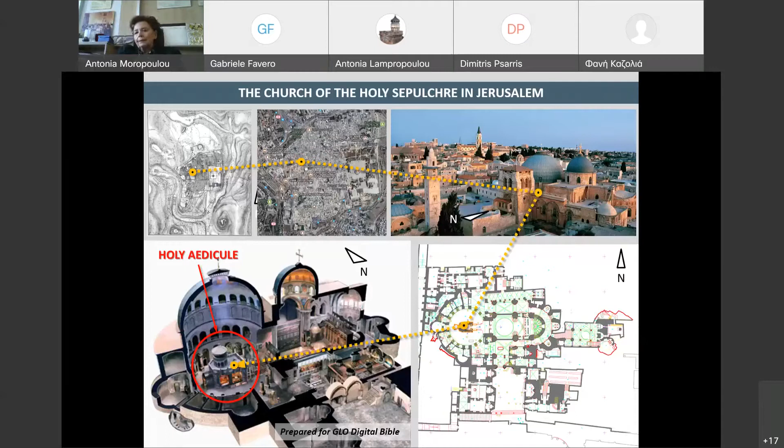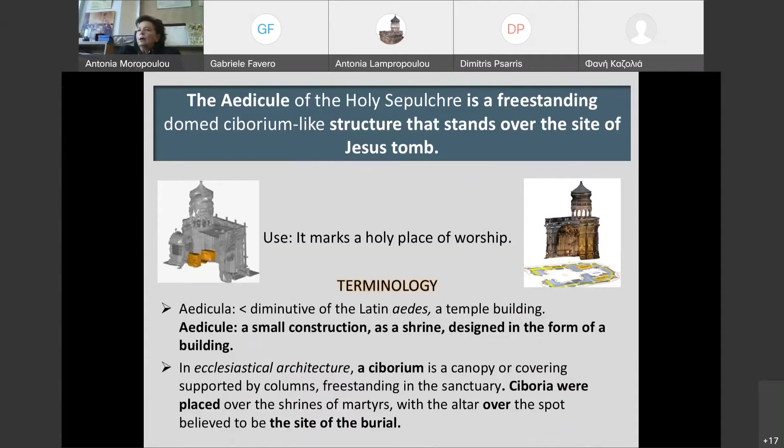Through the ages, the Church of the Holy Sepulchre in Jerusalem is the most important monument for Christianity, and not only. In the Holy Sepulchre complex there are brought nearby the Golgotha, the crucifixion place, and the tomb of Christ where he was buried and resurrected. The Holy Tomb was covered by the Holy Aedicule, a small construction, a shrine designed in the form of a building, which was transformed through the centuries from a rock-cut grave to a ciborium supported by pillars, and finally at a

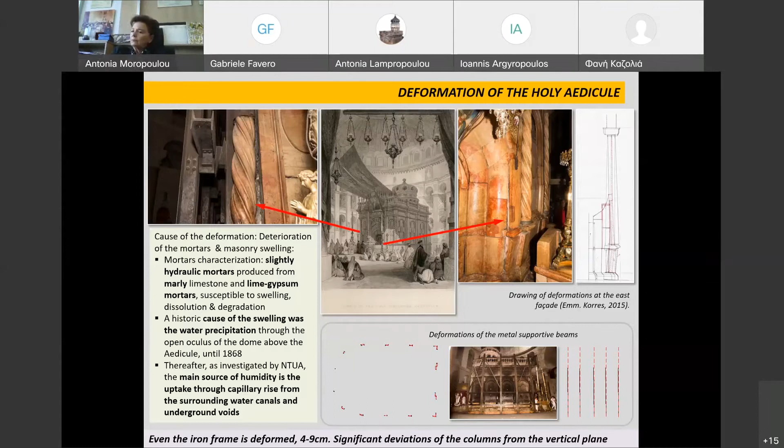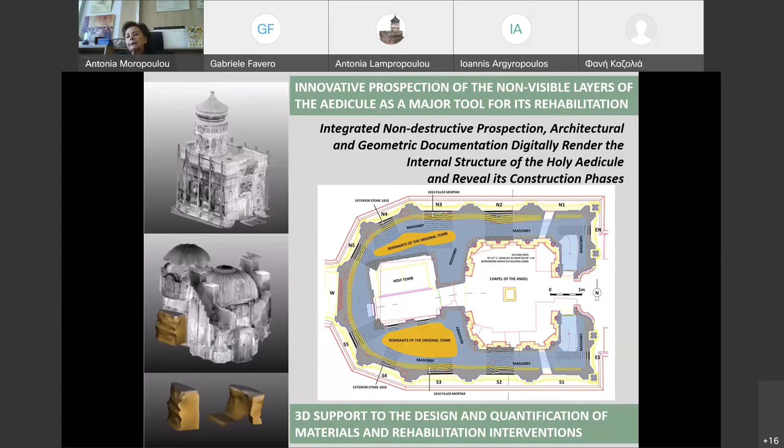1947. The innovative prospection of the non-visible layers of the Aedicule as a major tool for its rehabilitation was a real start of the diagnostic project. Here you might see the 3D support we developed to the design and quantification of materials and rehabilitation interventions after the integrated non-destructive prospection, architectural and geometric documentation, and the digitally rendered internal structure of the Holy Aedicule by the ground-penetrating radar prospection.

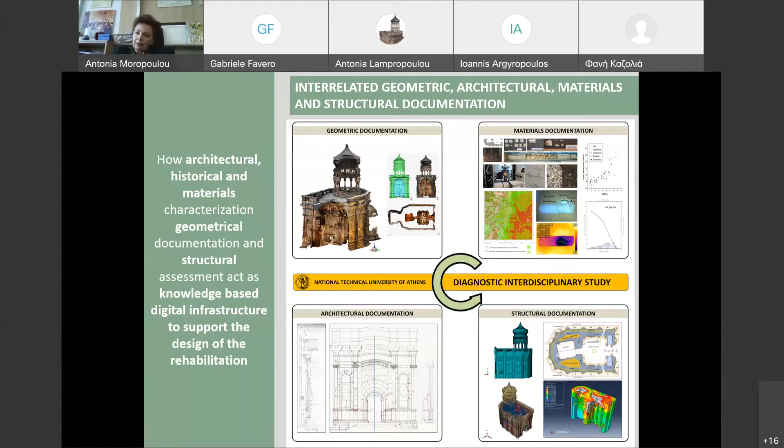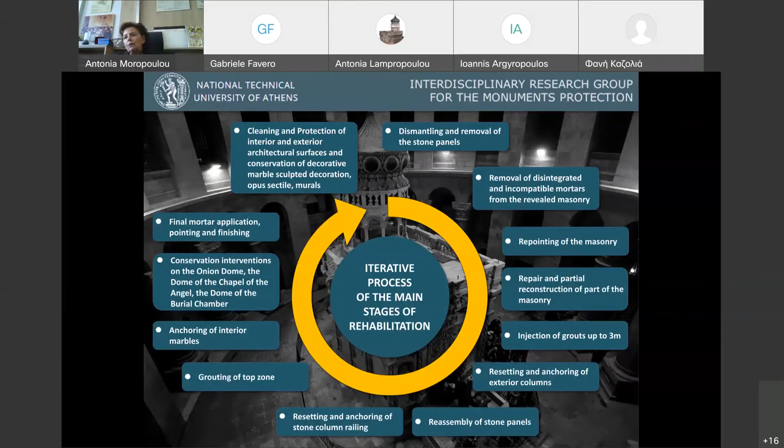The interrelated fusion of data became feasible due to the 3D documentation, due to the materials documentation, due to the architectural documentation, which permitted the structural assessment through the construction of the finite element modeling approach, using all the elements of the non-destructive prospection, the modulus of elasticity out of the materials characterization, and of course, all this fused and evaluated on the level of the 3D model. That made feasible to design the iterative process of the main stages of rehabilitation, which gave us the tools to proceed with a strict plan and to proceed effectively within the time limit we had, and it was very, very short.

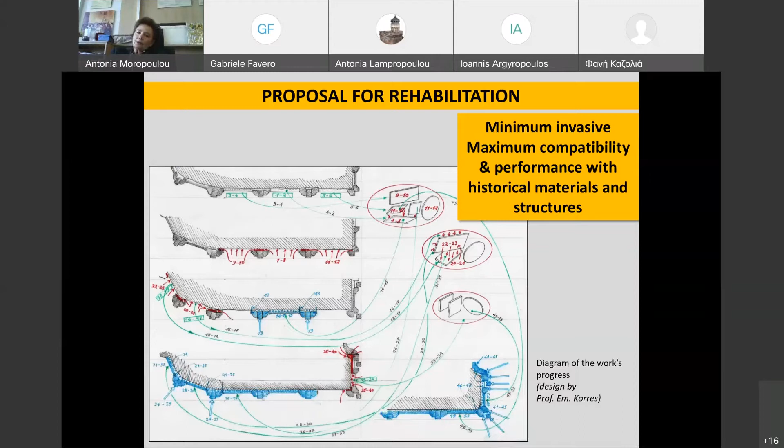However, the philosophy of this proposal of rehabilitation was the minimum invasive and the maximum compatible and performing interventions with the historic materials and structures. And that means not inducing anisotropy, similar thermohydric behavior, ensuring breathability, not introducing soluble salts, adequate mechanical performance, which was assessed with the FEM, while the non-destructive tests like the infrared thermography were actually documenting compatibility or incompatibility of materials to the structure, and of course the problems of the humidity uptaking.

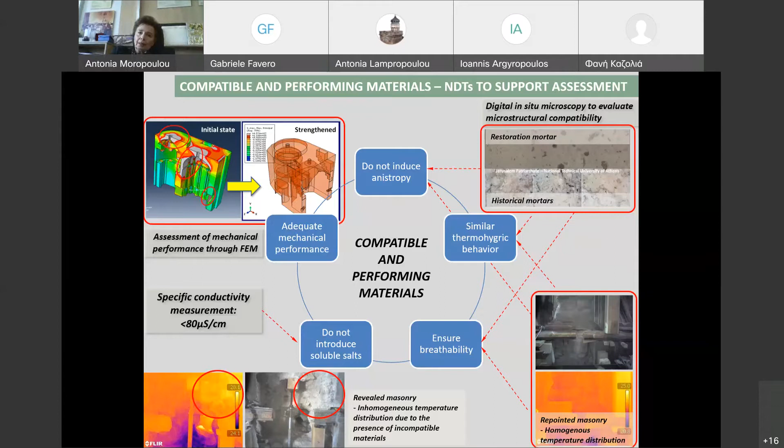The common agreement of the status quo provides NTUA and me personally with the honor and the huge responsibility to have the supervision, the scientific supervision of the project rehabilitation, and more explicitly, scientific, technical, and administrative aspects of the project were under my responsibility. The signatures of the Greek Orthodox Patriarch of Jerusalem, Theophilus III, of the Custos of the Holy Land of the Franciscan Order, Pier Battista Pizzaballa, who was succeeded by Francesco Patton, and the Armenian Patriarch in Jerusalem, Archbishop Nourhan Manougian, were the actual initiators of the project.

And which was the project? The project was a real challenge from every aspect of implementation methodology. First of all, the construction site should comply with the urgent need for continued operation of pilgrimage and of all the liturgies, while the decision making should be scientifically supported by the continuous scientific on-site assessment of all the interventions to the monument, while a crowdsourcing funding was searched out and achieved with the responsibility of the three religious authorities.

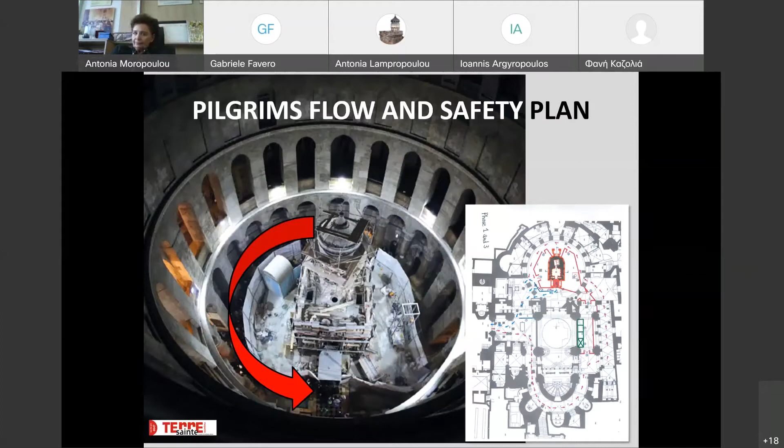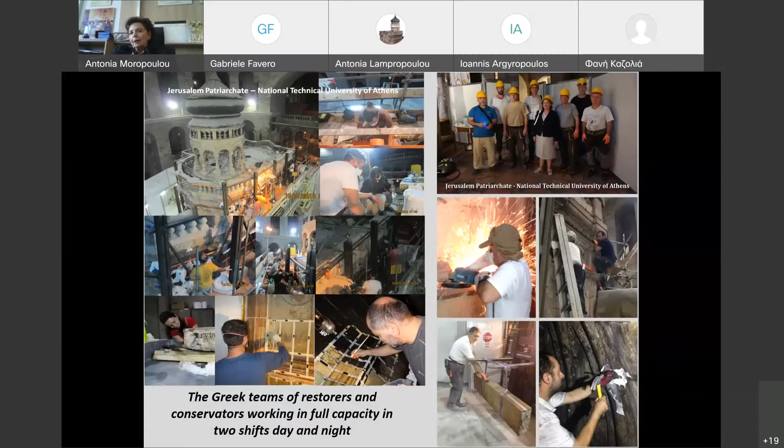The work site is successfully organized without disrupting the flow of pilgrims or the religious functions. An additional lateral support to the '47 iron frame of the British mandate was applied. A pilgrim's flow and safety plan was modified. A conservation lab was established and functioned in the Franciscan Gallery, and at the same time, an interdisciplinary scientific lab was established nearby the Holy Aedicule. The Greek team of restorers and conservators were working in full capacity in 2 shifts, day and night, and the scientific team was working in parallel with all of them.

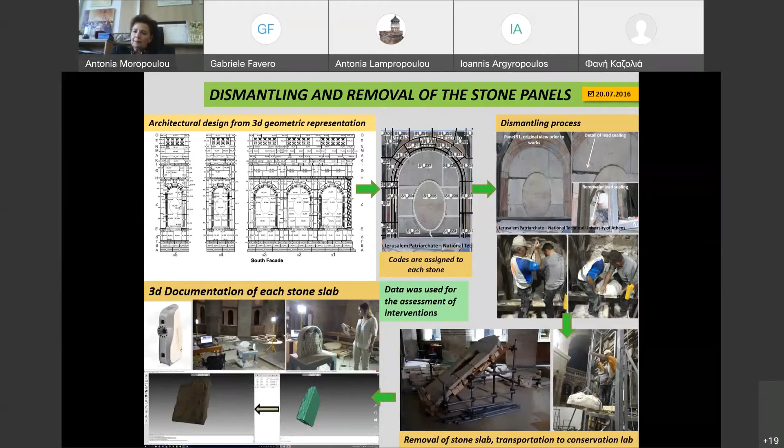The phases of the works flowed to accomplish the project on time. We started with dismantling and removal of the stone panels, which were transferred to the conservation lab to be documented and preserved.

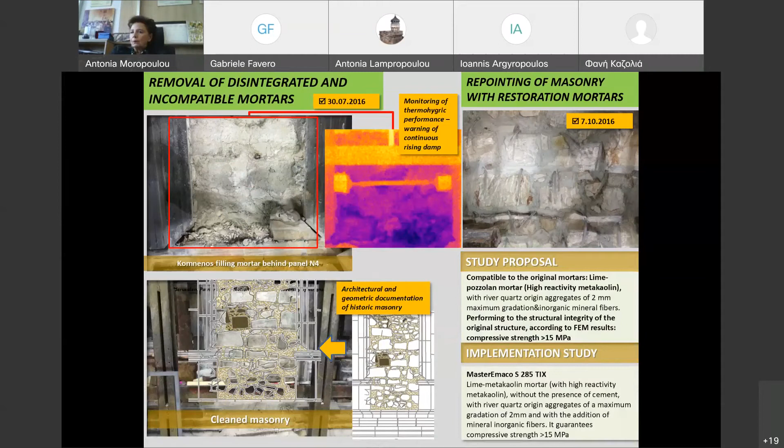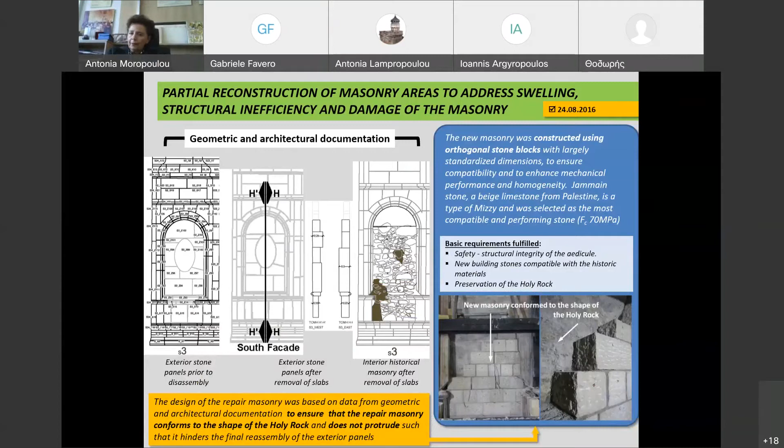Removal of disintegrated and incompatible mortars, repointing of masonry with restoration mortars, partial reconstruction of masonry areas to address swelling, structural inefficiency and damage, using proper compatible stones from the actual historic constructions. A crucial phase was the homogenization of the structural layers and consolidation of the Holy Rock by injection of compatible grouts. We evaluated this on site, which was a very difficult and innovative task.

The grouting procedure involved ground penetrating radar, infrared thermography, and measuring the pressure within the capillary rise of the grouting, finally achieving consolidation of the Holy Rock and development of an active interface, testifying to the coherence between the different structural phases and showing that homogenization was achieved.

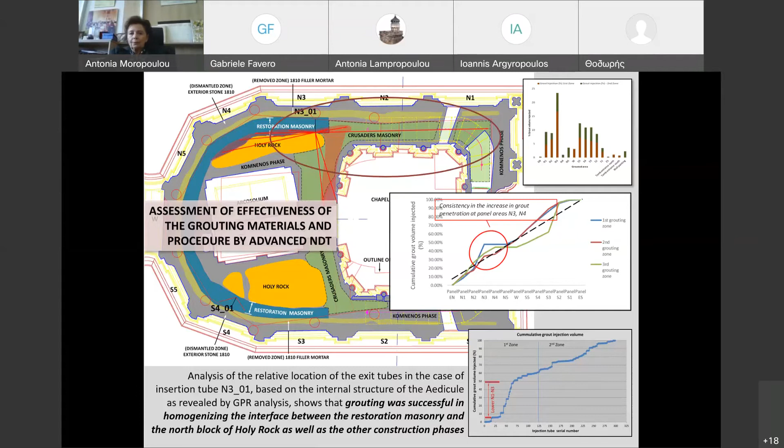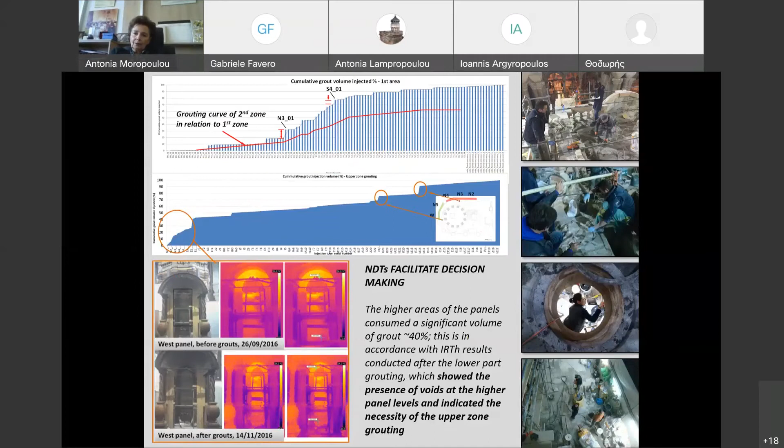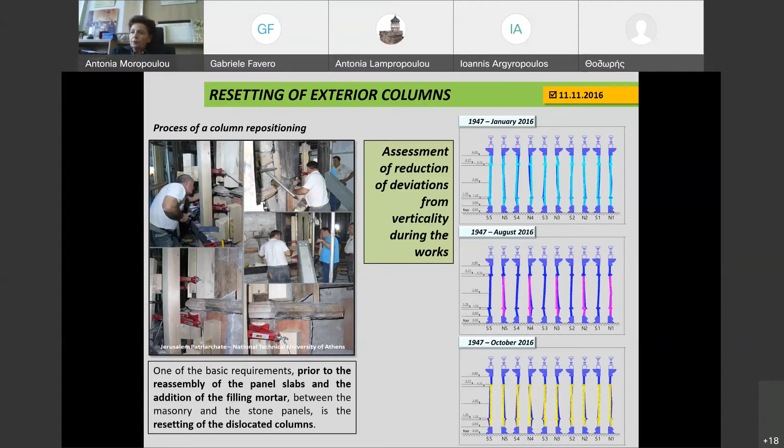After this stage, the resetting of exterior columns was a crucial event, since assessing the reduction of deviations from verticality during the works was not simple. It took us establishing a total geodetic station upon the conservation lab, and using for comparison the 1947 British report, upon which the iron frame was originally decided.

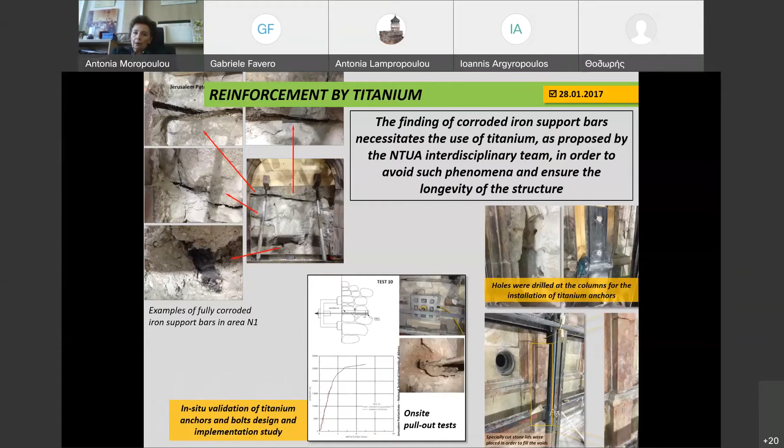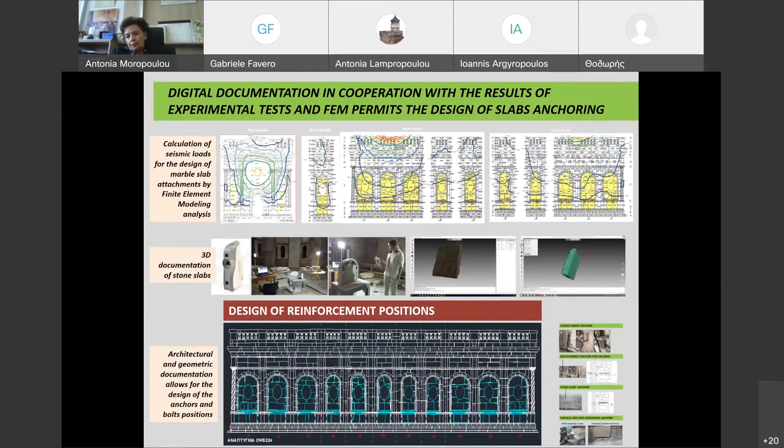Reinforcements by titanium were the suggested proper, compatible and effective intervention as a next step, through bolts and anchors designed all around the monument after pull-out tests and proper structural assessment by finite element modeling analysis, in order to achieve the structural integration result we needed.

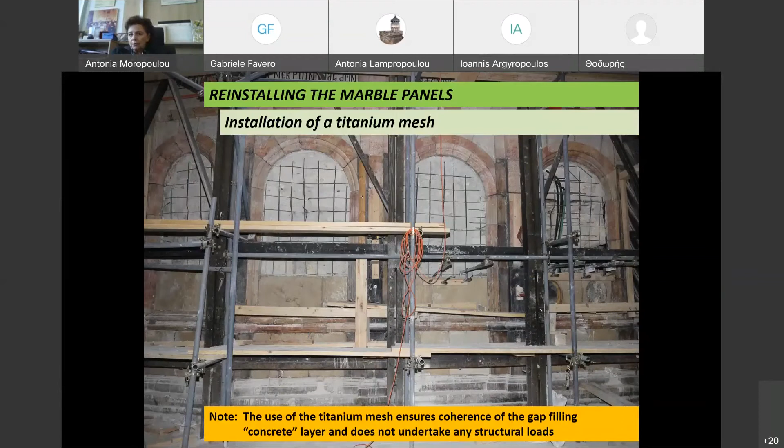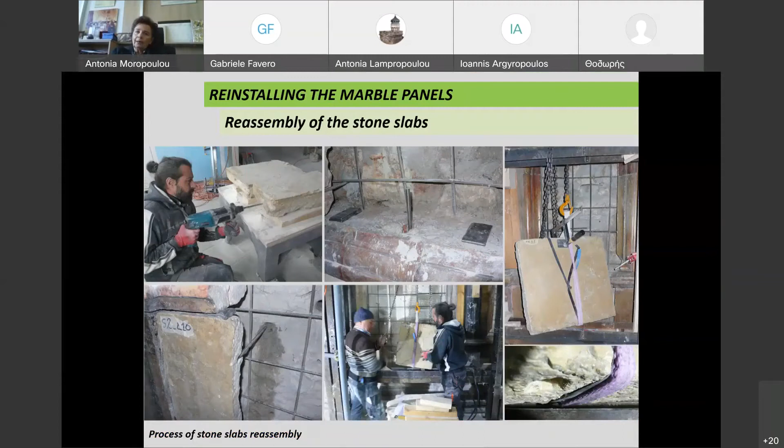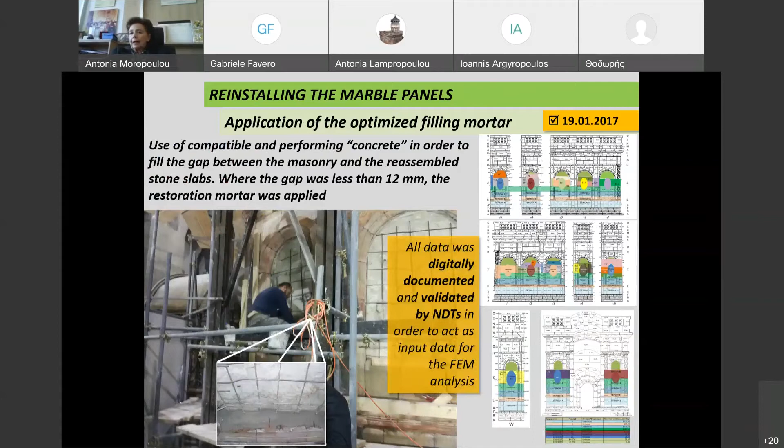Resetting and anchoring of interior marbles, reinstalling the marble panels after installation of a titanium mesh for cohesion reasons, and reassembly of the stone slabs coming from the conservation lab, reassembled at the same place by the code numbers documented at the beginning. Then application of the optimized filling mortar, in the form of concrete, according to the measurement of the gap between the slabs and the internal structures.

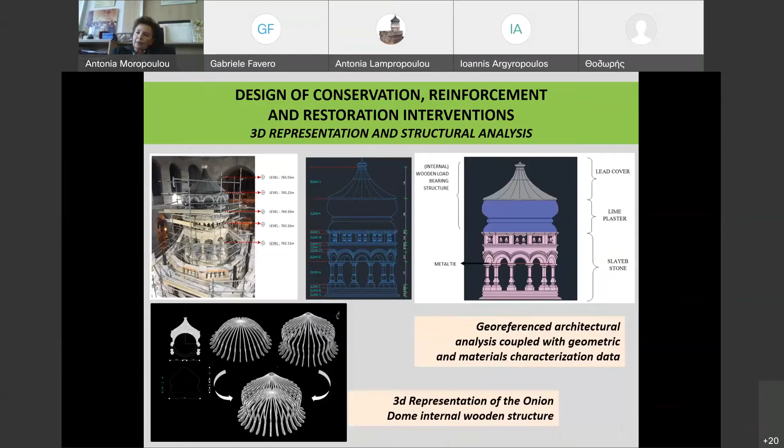Then we passed to the conservation, reinforcement, and restoration of the dome. After structural analysis, Professor Korres designed the metal support for the onion dome, the outer cupola. And from the Agricultural Zoology and Entomology Laboratory of the Agricultural University of Athens, Dr. Tsagkarakis

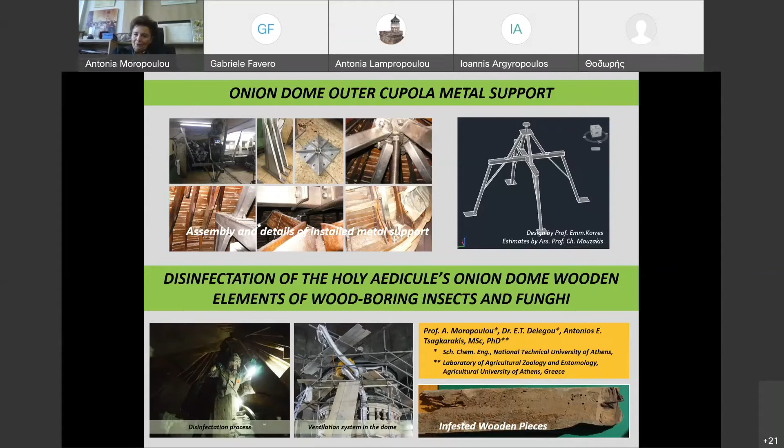made it possible to disinfect the wooden elements from wood-boring insects and fungi, a very difficult achievement.

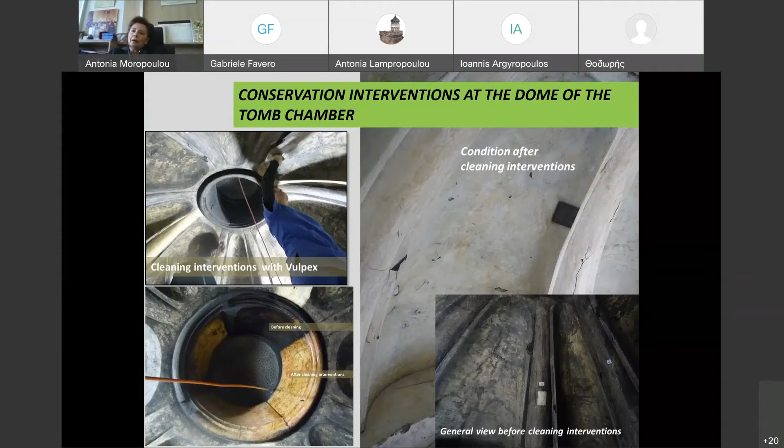Conservation interventions followed: application of plasters after cleaning and consolidating, preservation of the mural painting, and complementing the mural painting were next phases, along with conservation interventions at the dome of the tomb chamber and the chapel of the angel.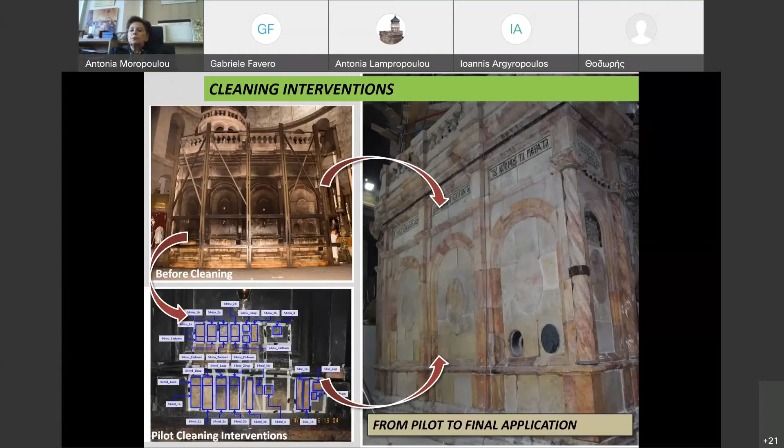Cleaning interventions were applied after proper pilot applications, in order to decide on the final materials and procedures, and the same concerns applied to protection interventions, which permitted us to preserve the final outcome of the cleaning effect.

So the goals at the core of the project were assuring structural integrity, revealing and preserving the values, and ensuring sustainability. These were put under question upon completion of the project. Were these aims achieved? Concerning structural integrity, the time evolution of the column's deviation from verticality

permitted us to diminish the deformations and testify to this. The multi-layered finite element model, the first time ever, because we were documenting all the phases of intervention and monitoring the achieved results after the materials and interventions used, permitted us to conclude that the principal stresses, maximum principal stresses, were being carried efficiently and homogeneously.

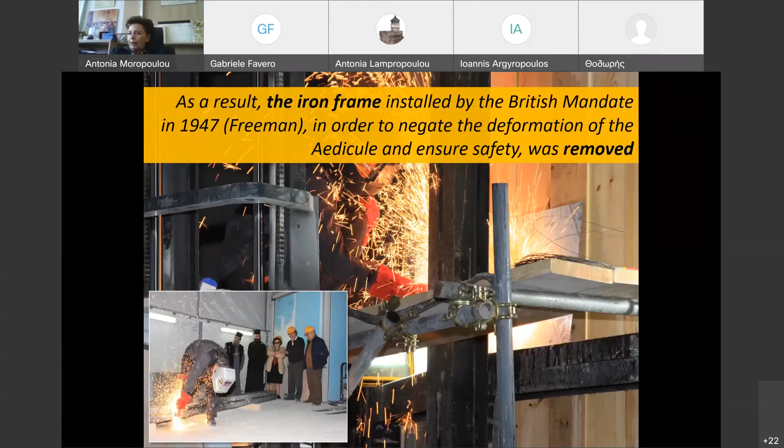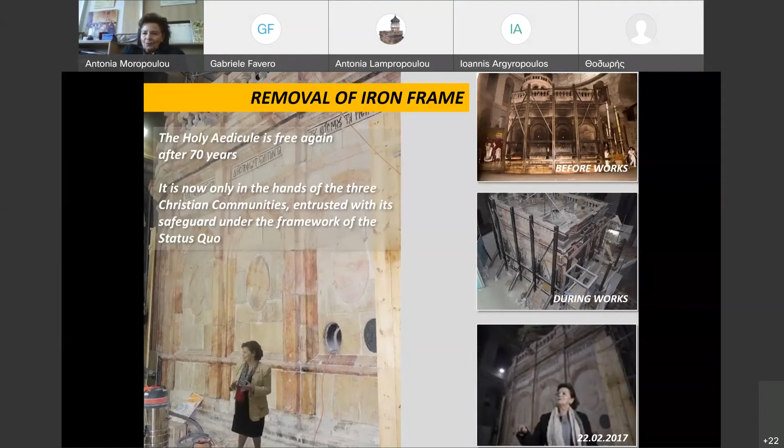After these evaluation results, we cut and removed the iron frame installed by the British mandate some 70 years ago. That was the actual test of structural integrity, witnessed by all the holy people of the three communities who were there, with anxiety, to attend what would happen.

But most important is that through this project we were revealing and preserving the values of the monument. Here you can see, for the first time ever, that we revealed the Holy Rock, the archetype material of the burial monument.

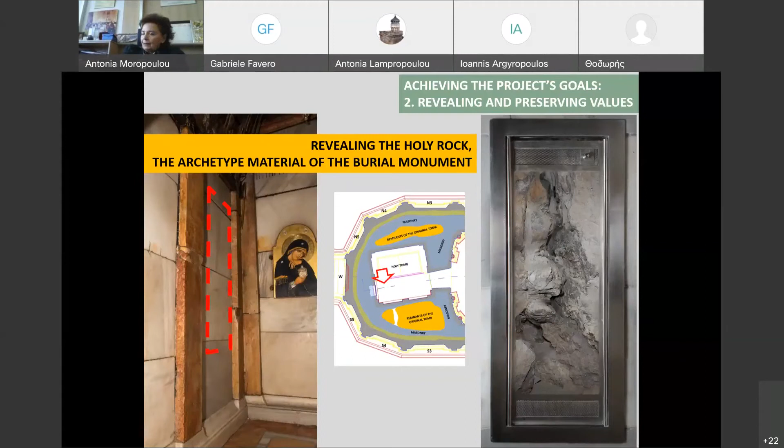We of course preserved the gilded decorations, but without developing a Rococo intervention that came some decades after the Baroque restoration of Kalfas Komninos Mytilineos. We achieved to reveal and preserve the frescoes.

Here you can see, at the chamber of the tomb, that we made the myrrh bearers visible, which were not evidenced before.

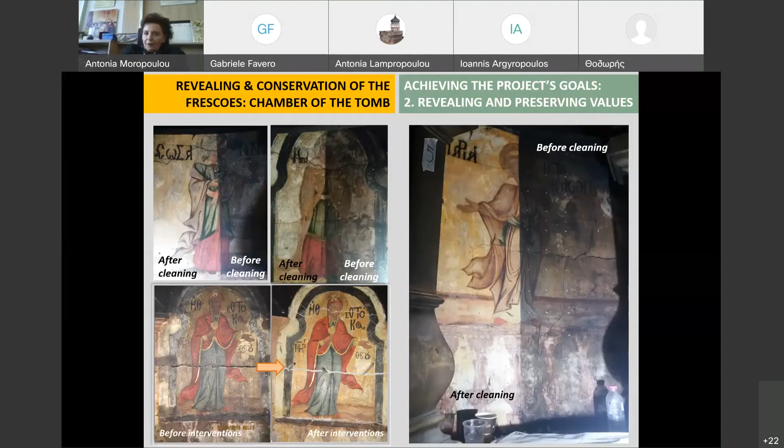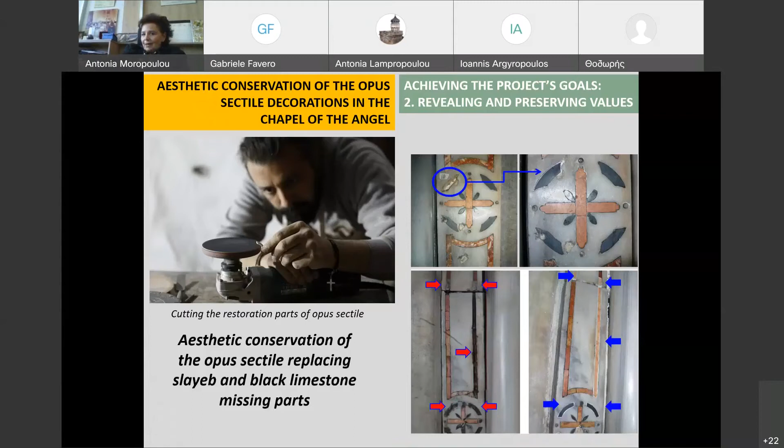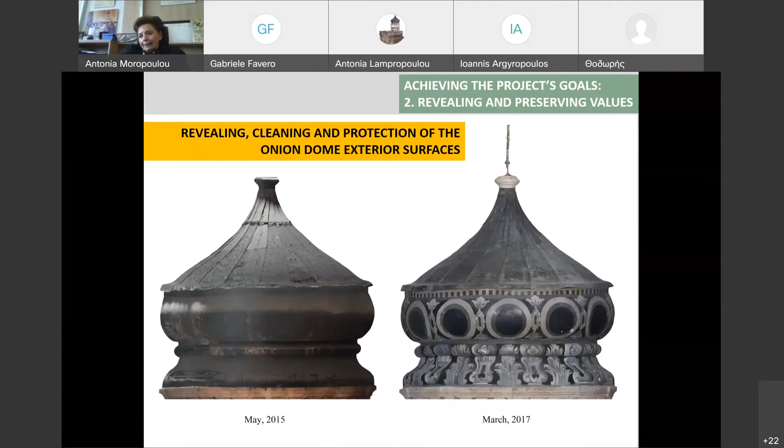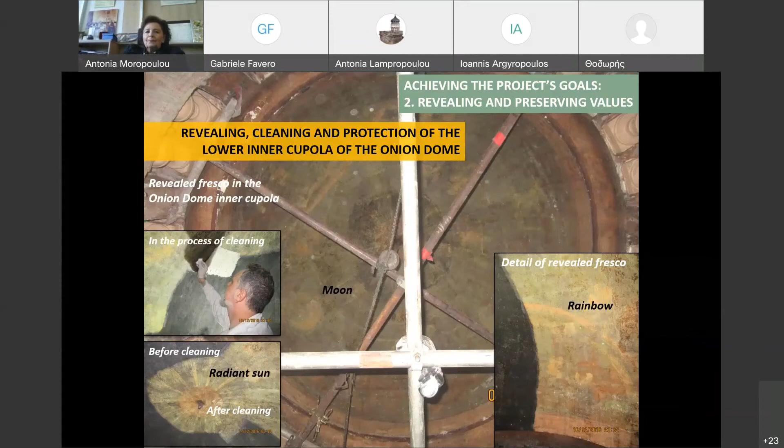And the opus sectile decorations of the chapel of the angel were preserved, as well as the onion dome exterior surfaces, which were cleaned and protected, and the colors of the resurrection were made obvious: the rainbow, the moon, the sun, evidenced after cleaning.

But most important was the revealing of the exterior facade inscriptions, all in Greek. That was the cross of Komninos, which reads: Kalfas Komninos Mytilineos Episen, made October 15, 1809.

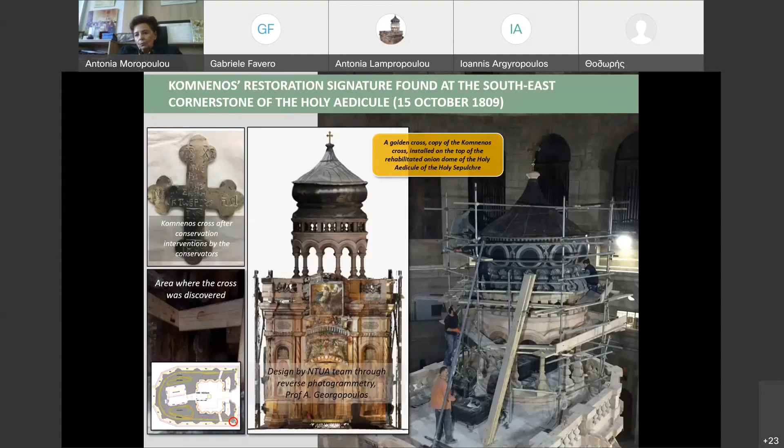And that was the fingerprint of the restoration of Komnenos. I should say that Professor Georgopoulos made the reverse photogrammetry to the Holy Aedicule in order to estimate the dimensions of a cross that was simulating the Komnenos cross in order to deliver it to the three Christian communities.

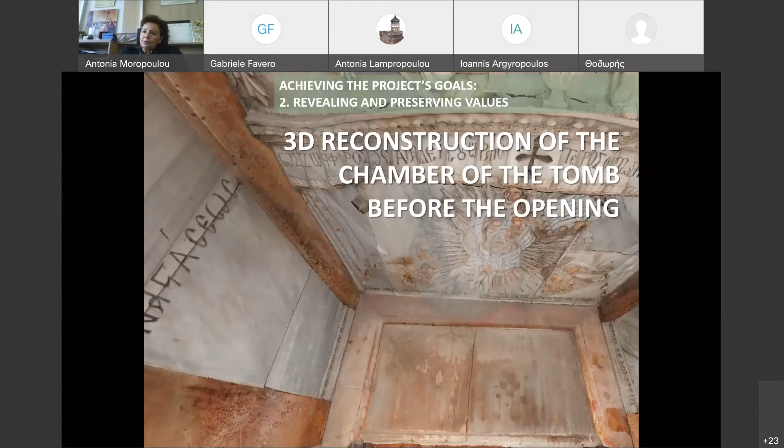So the findings and the values were major for these monuments. The 3D reconstruction of the chamber of the tomb before the opening.

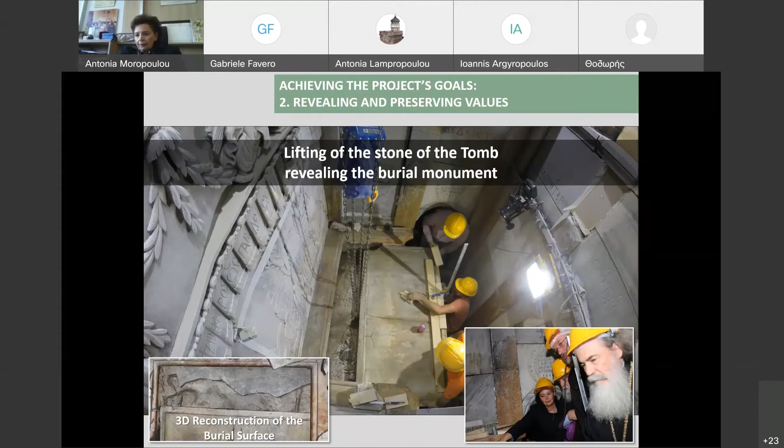But the major moment was the lifting of the stone of the tomb, revealing the burial monument, the tomb of Christ. That was on the 26th of October, 2016, and here with the three custodians of the tomb of Christ, we actually discovered the tomb of Christ.

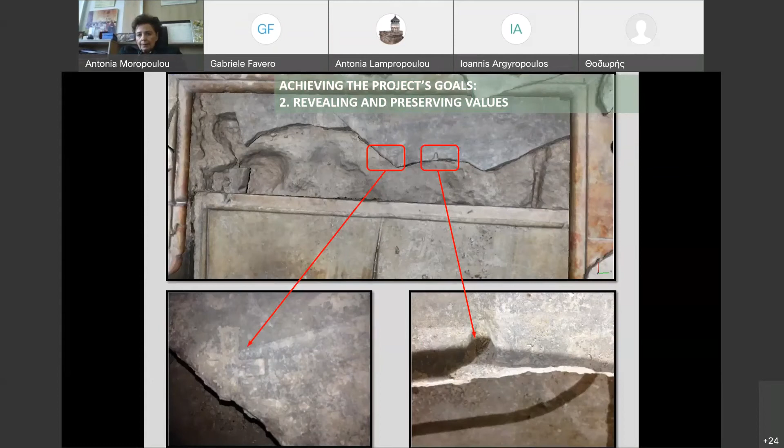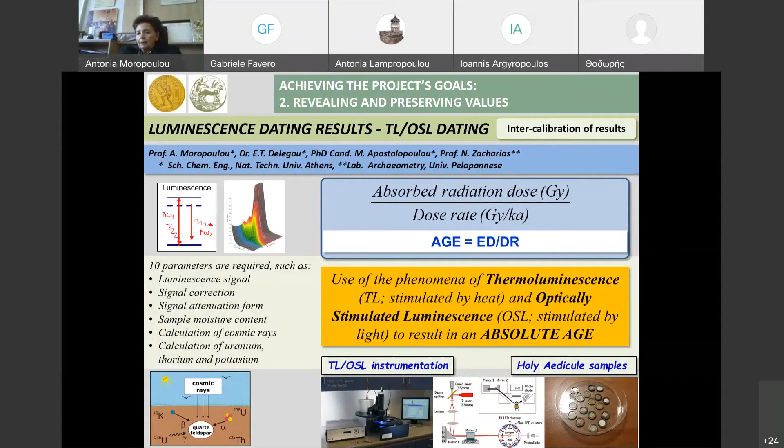Here you might see the second slab, this gray slab with a cross. We had the permission to perform luminescence dating, and it was actually estimated at the Constantine the Great period, this gray slab, even though around the tomb we discovered mortars from all the eras - the Byzantine, the Crusaders era, the Renaissance era, and the Komnenos restoration as well.

And that was very important because even from the Renaissance, from Bonifacio di Ragusa, we had some important mentions that this was the period when the last time the tomb of Christ was opened.

But actually, from our findings and the historic context that we studied, it seemed most probably that after the Khwarazmian Turks' destruction of the tomb in 1244, according to Oxford, a Biddle testimony, it was at 1345 that a pilgrim saw for the first time ever the slab we moved.

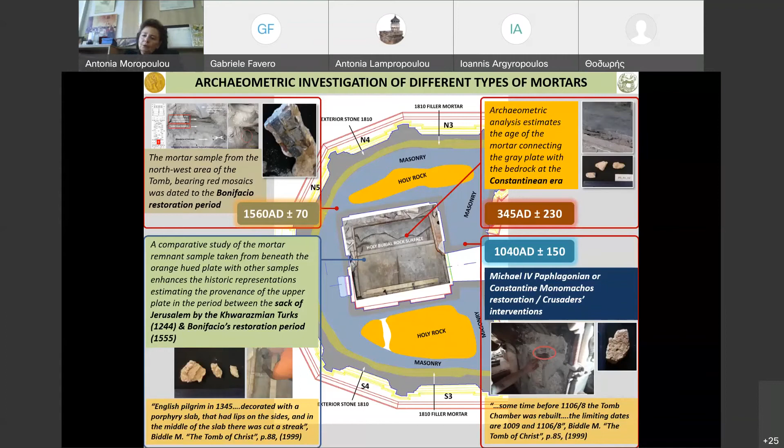So it seems that after 7 centuries, we opened the tomb of Christ and we used the most innovative, non-destructive inspection in order to study the morphology and the materials of the monument.

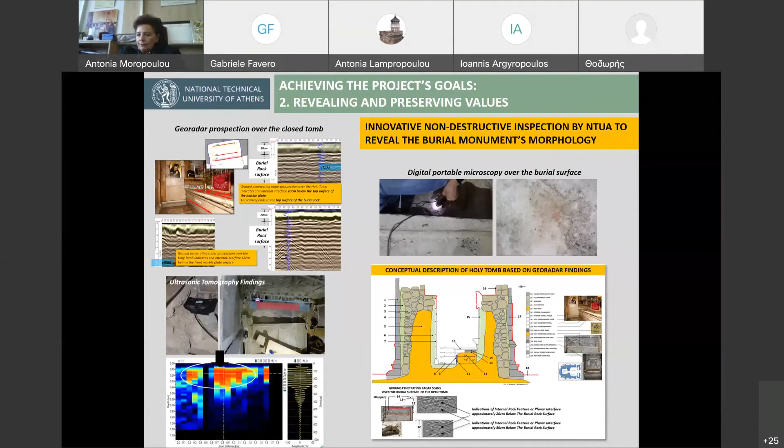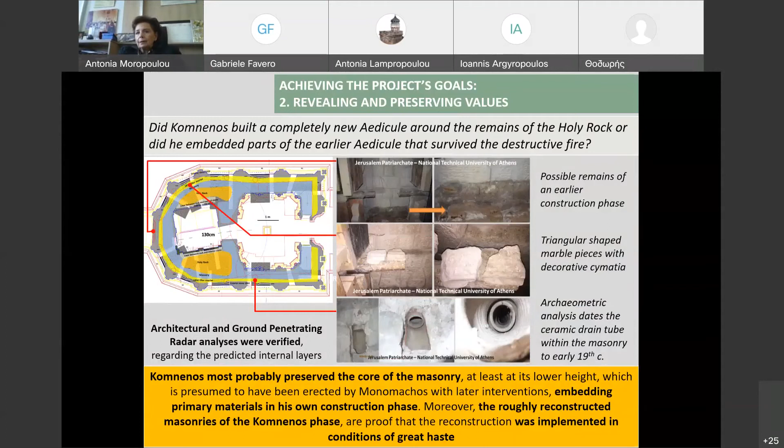As you might see here, with non-destructive testing, we discovered a lot of the morphology and a lot of what was beyond the tomb. And it seemed that the historic continuity of all the findings was showing the respect of all, and the final restorer, Komnenos, before NTUA, who actually preserved findings from the Byzantine era to the Crusaders era and to his period.

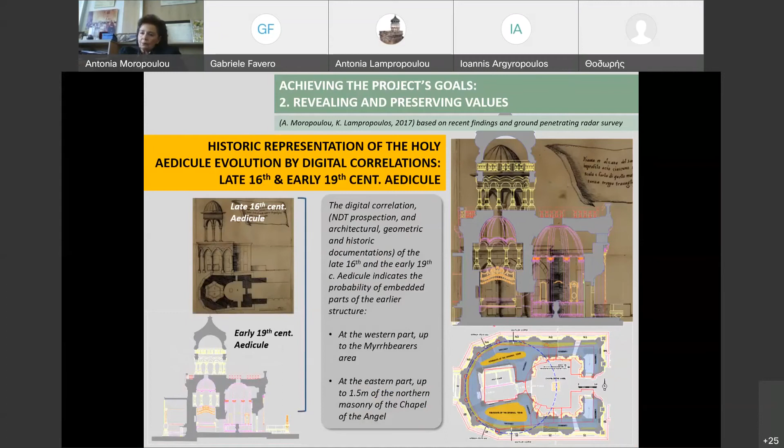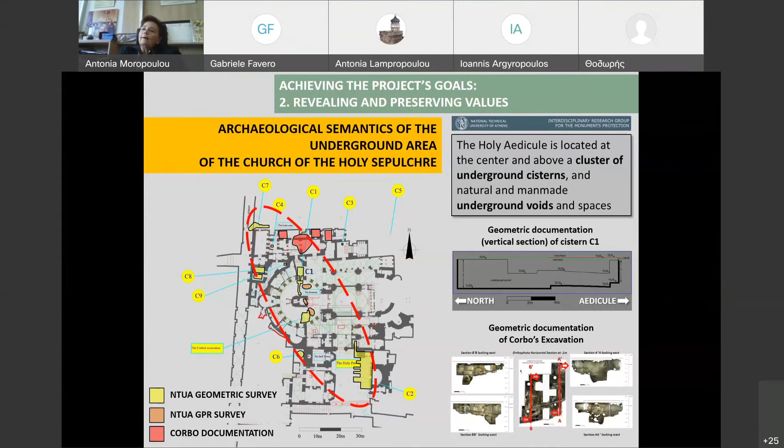Of course, historic representations during centuries permitted us to study the evolution of the architecture of the monument, and at the same time to study the archaeological semantics in the underground area, because there were laying the tombs studied by the archaeologists, especially Israeli archaeologists, and they were actually evidencing the existence of the tomb of Christ.

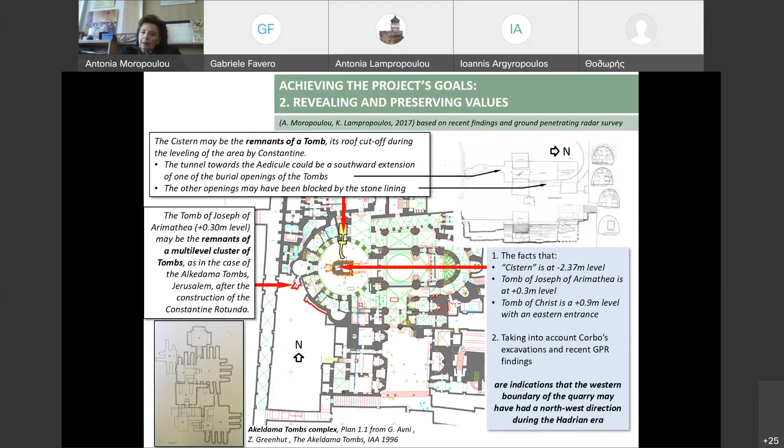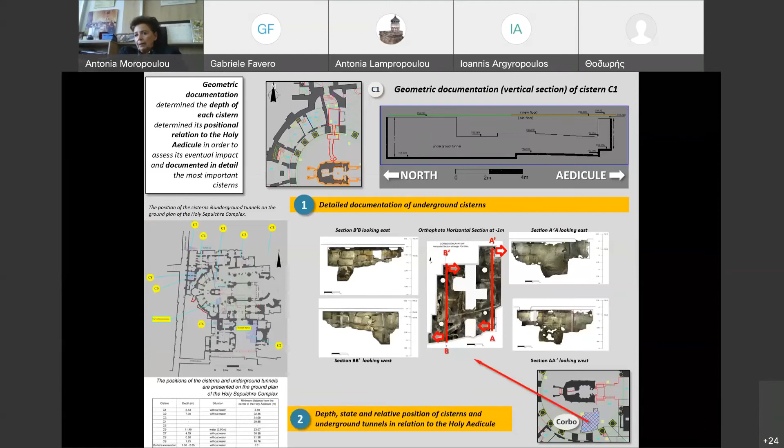However, all these important underground remnants, channels, and tunnels imposed on us the need to document the underground area. And the geometric documentation, as well as the non-destructive documentation, became tools to ensure the sustainability of the monument.

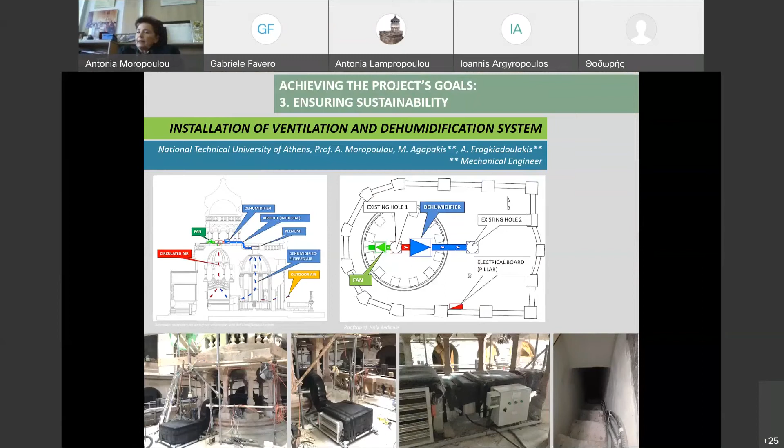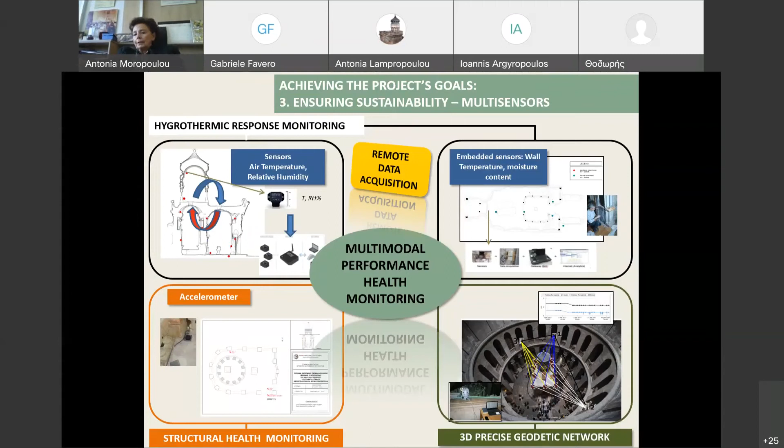Of course, the sustainability of the monument is being assessed through time, and it was very important, beyond the installation of ventilation and dehumidification system, to install a multimodal performance health monitoring for hygrothermic loads, for seismic loads, and for precision monitoring through a geodetic network, in order to ensure sustainability through time.

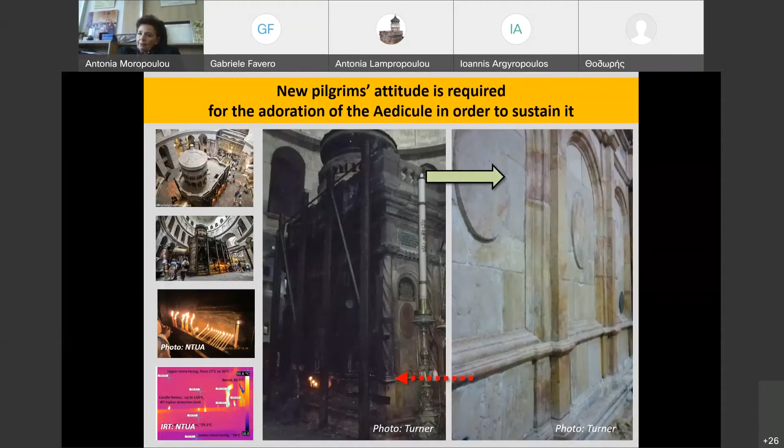But the most important, the first sign of sustainability, was that we had a new pilgrim's attitude, which was actually required in order to respect the monument, and the pilgrims respected the monument.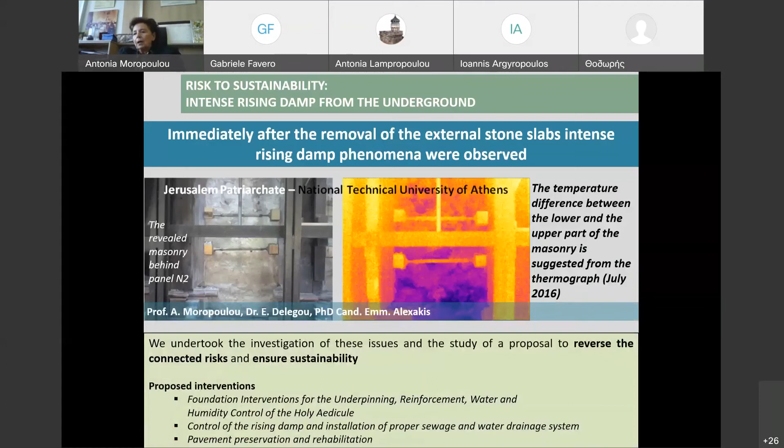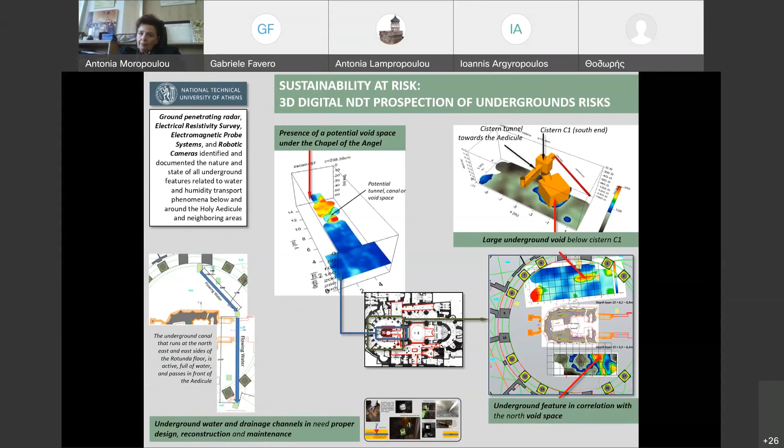But the rising damp, intense phenomena that were observed were actually a risk for the underground area. And the non-destructive inspection in the underground area by ground penetrating radar, by electrical resistivity survey, by electromagnetic probe systems and robotic cameras permitted us to study all the risks, to allocate them, to map them.

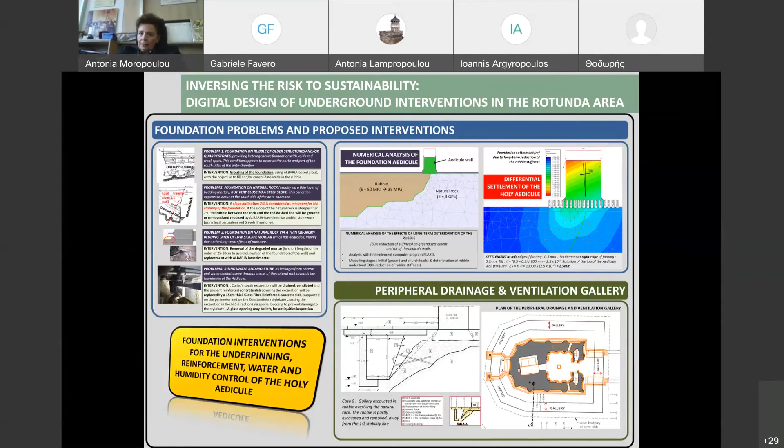In order to make the study which we actually delivered to the three custodians along with the project for the underground interventions needed at the Holy Sepulchre Rotunda, to assure safety and sustainability of the Holy Aedicule rehabilitation, to assure sustainability from differential settlement of the Holy Aedicule, to install a peripheral drainage and ventilation gallery, and actually to stabilize the rotunda through installing these pillars in the underground area, as well as by installing new sewage and rainwater networks in the underground area.

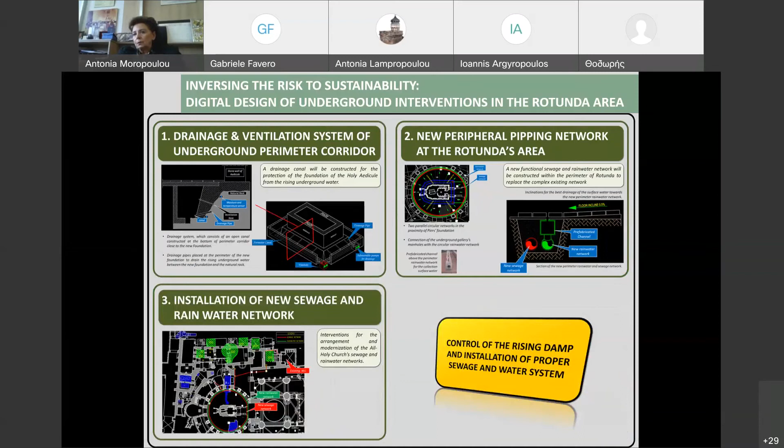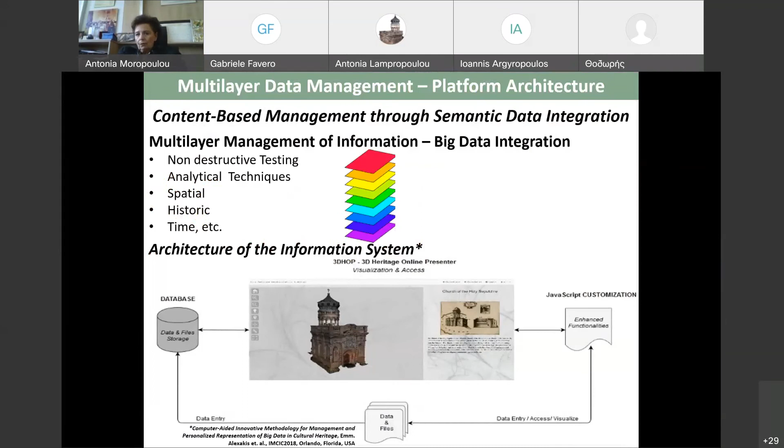The work finished, but the need to transfer along with the know-how, the data - this semantic data - means a content-based management, a multi-layer management of information with an architecture that would permit to integrate and reconstruct the whole of the monument and of interventions, is a need.

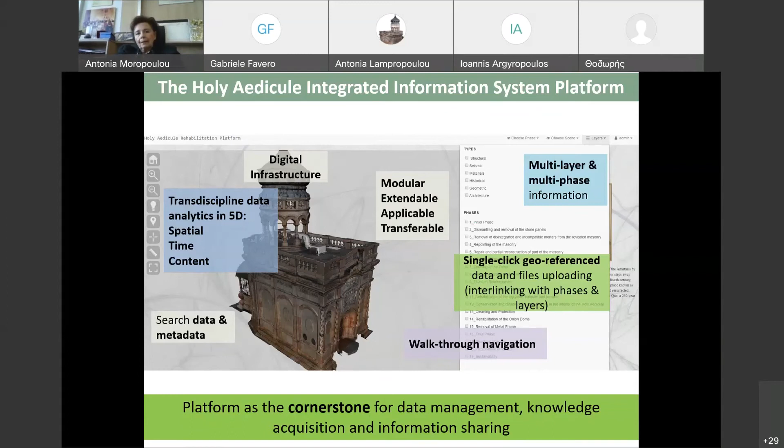Today, we comply with this need through a project called Respect, in order to make all the data available to the scholars of the world.

And that was the reason that the European Union, before delivering the Holy Aedicule to the three custodians, required a presentation from us some days before, and it became an exemplary project.

The project we delivered on time on March 22nd of 2017 at the Holy Sepulchre, with the presence of Christian unity, not only on Jerusalem level, but on ecumenic level as well, with all the political and diplomatic representatives of the Middle East and European and international area being present, with Greece at the epicenter.

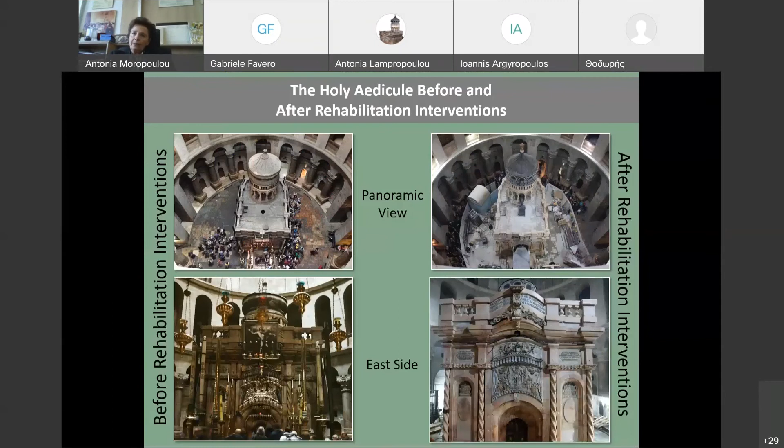The Holy Aedicule before and after interventions showed that what is impossible, which should be made feasible today, is to sustain this work.

That's why we continue research, and we are keen to explain to the world, as we did during the project, what is happening.

Every steering committee was followed by a media presentation, and the strategic cooperation with National Geographic, which presented the historic opening of the tomb with exclusivity and first time ever, made it feasible for 2 to 3 billion people around the globe in all continents to attend the works at the Holy Aedicule.

And the digital experience exhibition, an immersive experience, which started with National Geographic at its museum in Washington on November 15, 2017, and continued at the Byzantine and Christian Museum of Athens from May 2018 to February 2019, permitted us to inform society. And Christian unity became social unity.

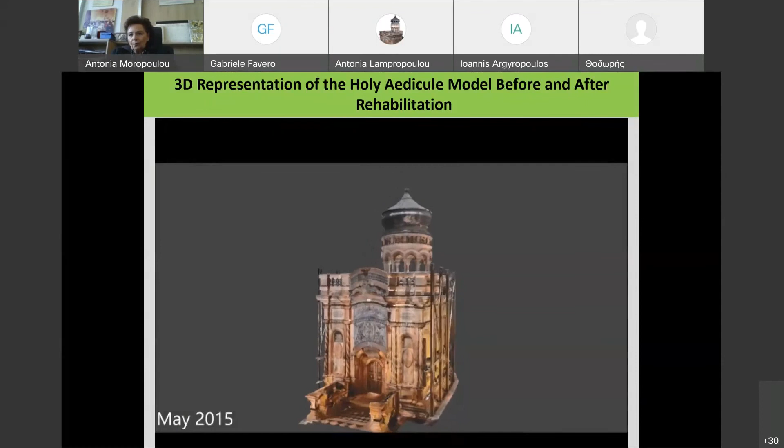Innovation only amplified its voice. Professor Georgopoulos will show and explain to you how we performed the geometric documentation, a 3D documentation, and that was a very important tool because today it is a holistic approach.

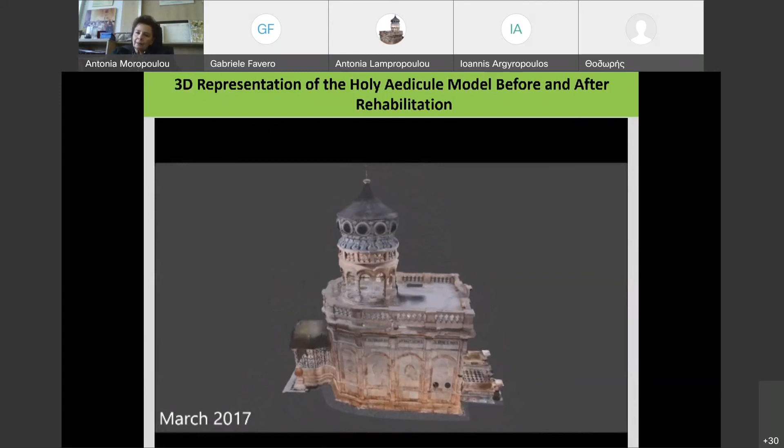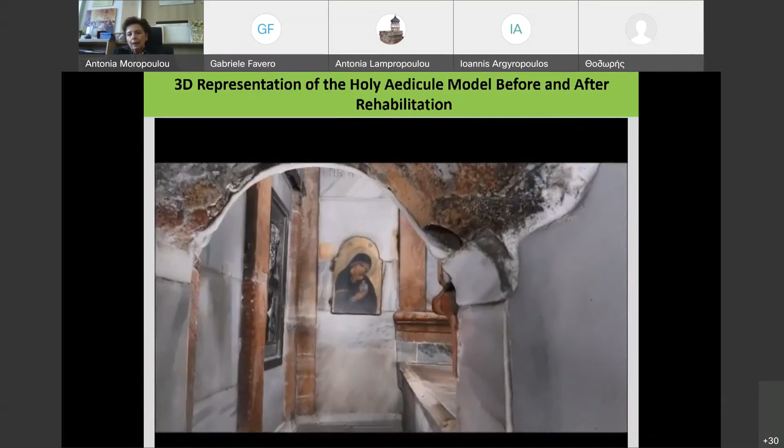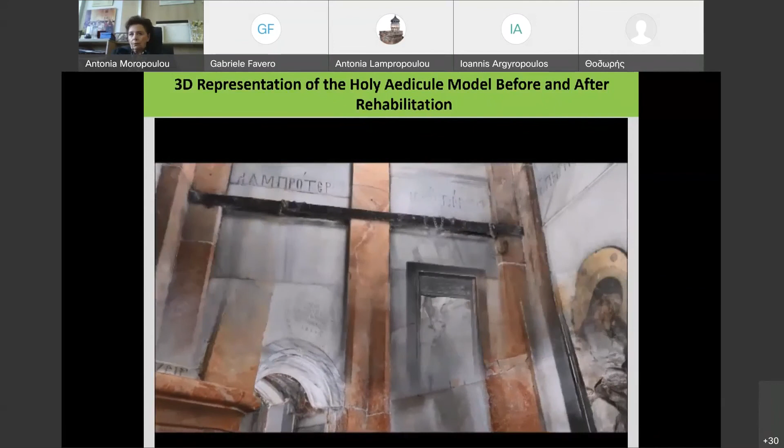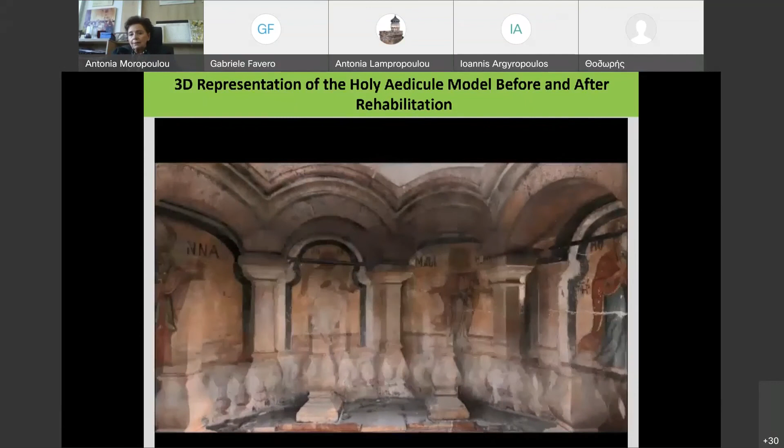We started from a fragmented approach, and then by transferring this knowledge to other projects and entities, we developed with all of you a new perspective for a new era for the preservation of monuments, where 3D documentation permits us to fuse and merge all the scientific disciplines' data and communicate in a common language across different disciplines: architects, historians of art, archaeologists, theologists, engineers, civil engineers, materials engineers, informatics engineers, all integrated upon a monument.

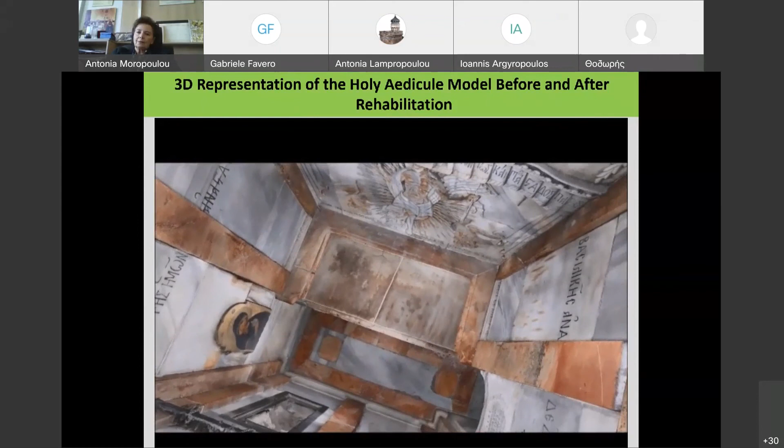That's why we say that monuments talk to us, and they talk to us in a language that we can transfer, this talking and this knowledge, to others. As you might see, from Oxford to Milano and many others, dialogue and research, interventions, and revealings.

We are coming to the second international conference, the TMM, which will take place from 13 to 15 December at the Eugenides Foundation in Athens this year, and you are all invited.

At the same time, we will discuss at this conference the Aedicule Approach. That means how to disseminate, through education, the interdisciplinary and integrated research and know-how, to strengthen the cooperation between NTUA and UniRoma, which is now scientifically responsible for the underground work for which we delivered the study, and to utilize the innovative work to transect with the history of architecture in Jerusalem through cooperation with Bezalel Academy and Israeli archaeology.